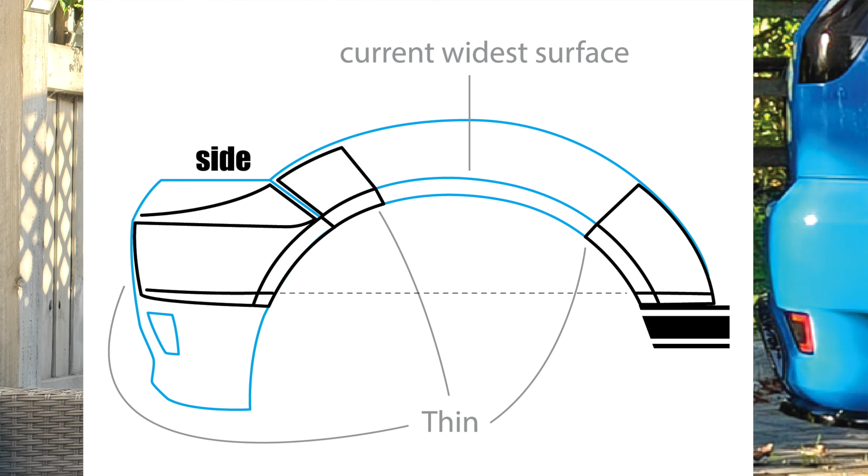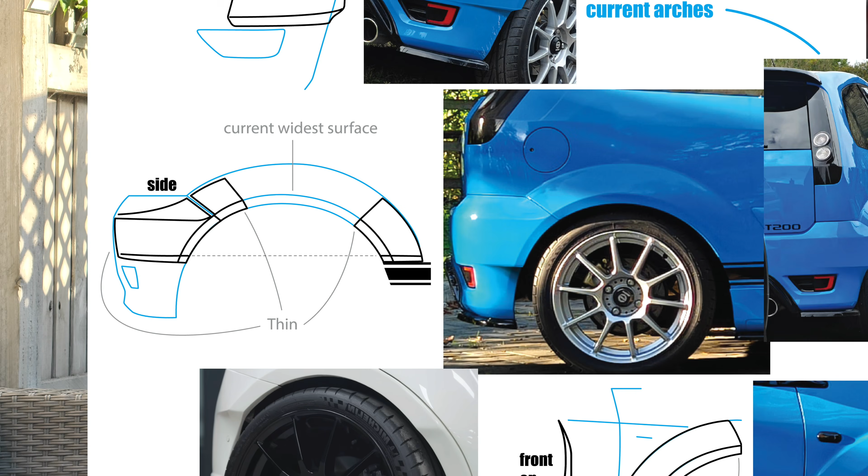Now, something I haven't mentioned, it's quite funny, because this is wider in a sense, but also not. Basically, the profile down the side of the car, what I didn't want to change was the widest point, the 12 o'clock position of the front and rear arches. The reason for that is I didn't want to mess with rolling and cutting the arches. What was the widest I could go on the wheel setup, but without affecting that?

So basically it was looking at the lines of the car to work out how to make it look wider, but without physically making it wider, if that makes sense. So I looked at how the lines of the car curve inwards from that 12 o'clock position, and thought, why don't we continue those lines and then eventually marry them back up to the original.

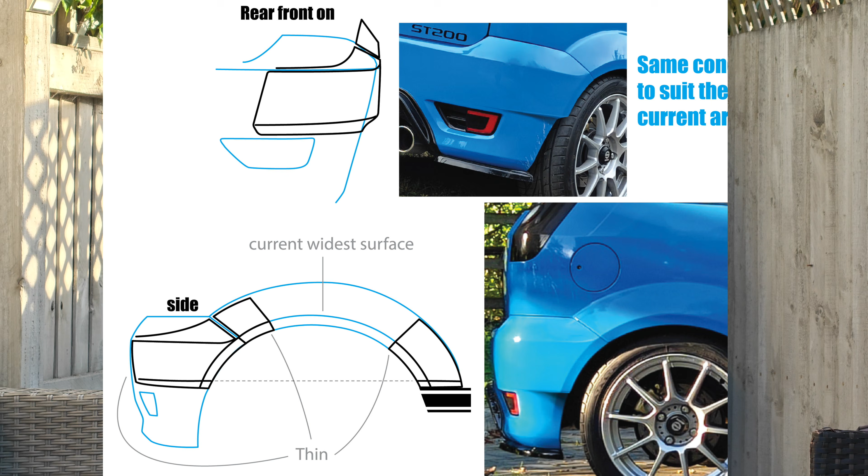I knew I was going to go with my body shop, Flawless, in New Mills, because I know John does a fantastic job. John's a good, solid name. I like it.

When I did get an idea of a price for if we were to cut the metalwork of the arches, it was very expensive, but you know what? Maybe looking back, that might not have been such a bad idea. But then it would have meant buying another rear bumper to do a lot of plastic welding. It was quite a lot of job.

So the concept I thought of, and I've seen a lot on YouTube recently, is something that's coming about - 3D printing parts. Then obviously you filler over the top and then paint. So I found a 3D printer and I commissioned it to be scanned in just the areas that I wanted.

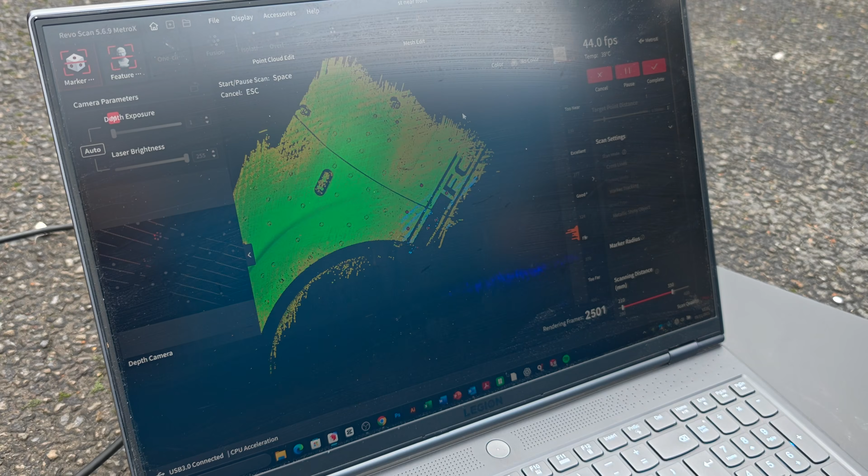So the central position all the way back and the front arches, and then at the back, again, making sure from the 12 o'clock position to the back - which later I wish I'd done the whole thing, because you'll see why.

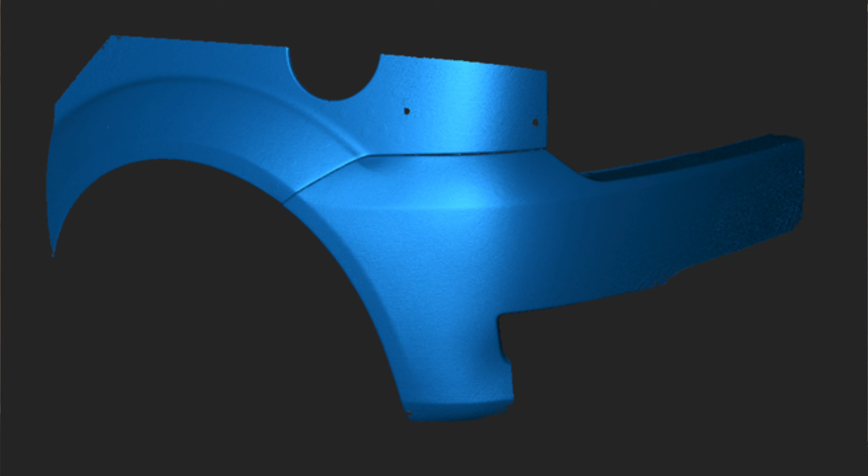So once it was all scanned, the guy had a 3D model of the current shape of the car. I then showed my concept, my drawings, and left him to it. Over the next few months, he started drawing up the new shapes for the car. He then went through 2 prototypes at the time.

The first one was to get the front arches - this was now early in 2026, and we were getting some early prototypes just to see if the 3D parts did actually mate up to the original bodywork of the car. Then we went to a second set where the shape was starting to form a lot better at the back, how I kind of wanted it to look, the lines.

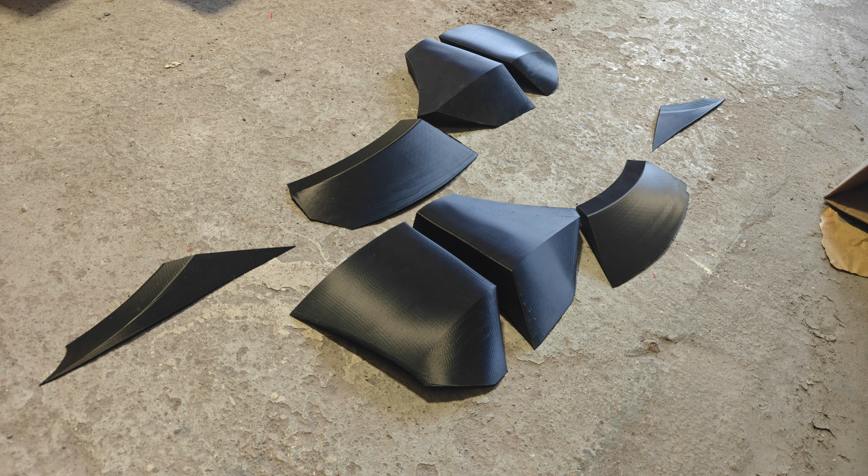And then finally, when it got to April, the final set was printed. So then you're getting to May now, where the car went to the body shop, and work was going to start progressing on getting these 3D parts bonded onto the car and worked in.

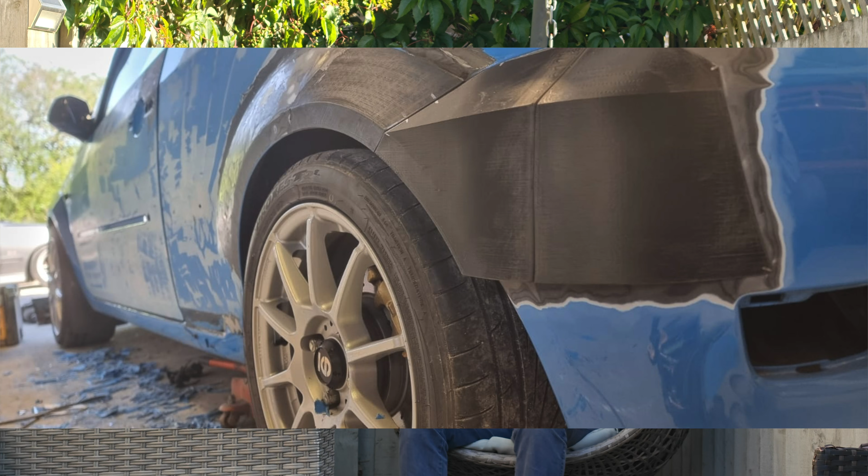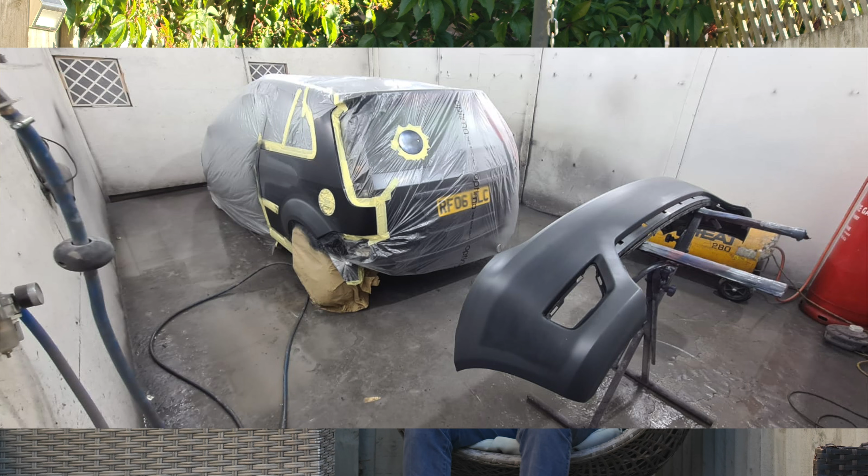Now, one thing is when John at the body shop, Flawless, started to sand back the passenger rear quarter, ready to bond on the new parts - the paint, I just want to make this clear, this isn't his paint. If you've followed me for a long time, you'll know that early on when I got the car, and I originally was thinking of keeping it all black, I got some body repair done on that panel, and I was never happy with the colour of what the guy had done.

Basically, I remember that car was given to him, and within days, it was all done and ready to collect, which was amazing - I thought, yeah, fantastic. But actually, what I found out was that it was rushed, and it wasn't done properly. Probably also why it always looked a bit weird in certain light.

Basically, it was pretty much flaking off, and you could see the layers - the blue paint was fine on top of the new black paint, but that black paint underneath, done years ago, wasn't done properly against the factory finish of the car, and it was all peeling off. Some sort of reaction. So it was going to happen eventually - it probably would have bubbled up.

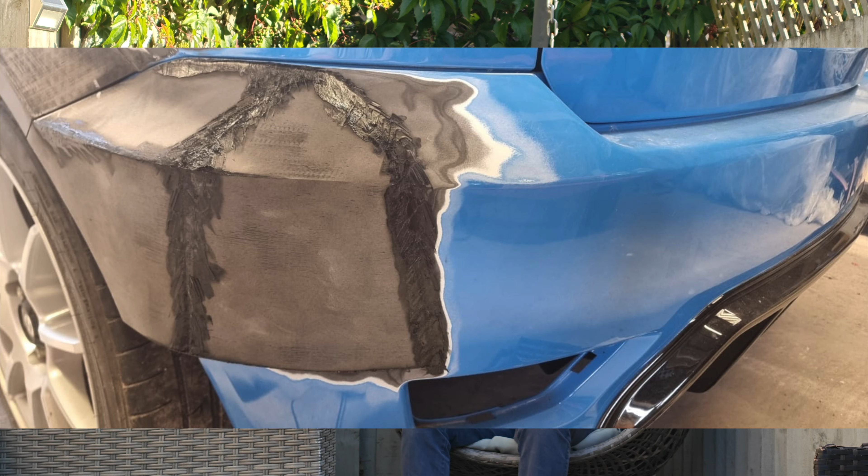You now have got the parts bonded on. Then it was a matter of him doing some plastic welding to make sure they all stay tight together, the parts that needed to be. They were nice and solid. He was making sure there were days and days for it to be fully cured.

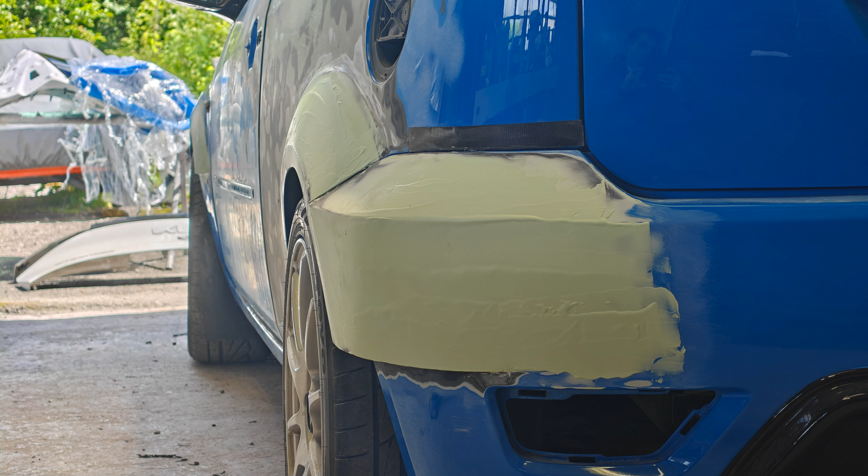Then it was a matter of filler, like fiberglass filler as well, which is notorious for max power cars. To be honest, people will probably stick their noses up at the fact that there's going to be lots of filler and fiberglass filler on this car. But you know what? That just makes it more of a max power car.

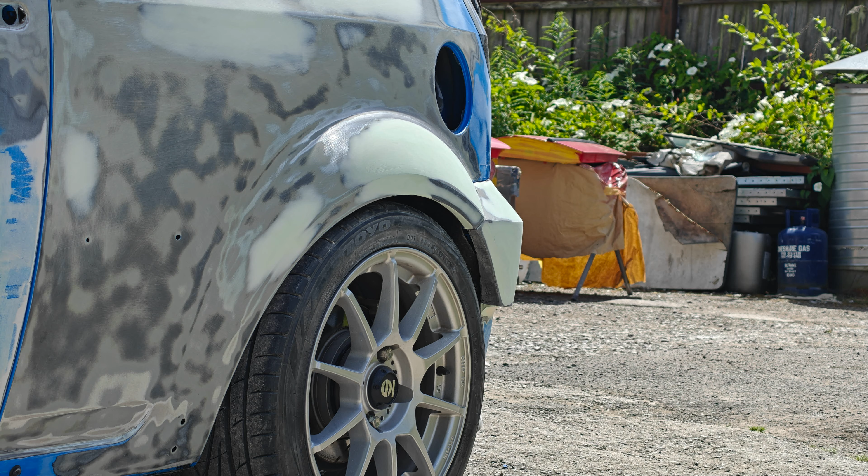What he kept doing was - the reason it took so long was he wanted to make it perfect. In order to do that, he kept having to do lots of thin layers, sanding it back, checking the shape, adding more filler, and the process kept going on and on.

It got to the point when he started to get it painted, because we were in a rush now for Max Power Reunion, the car show. It wasn't quite going to be ready, and I also needed the car for its MOT as well.

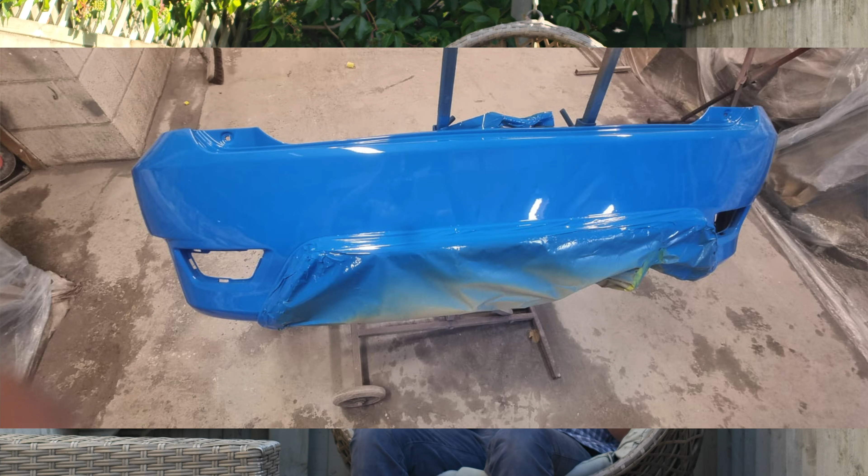I actually had to take it in, just after being painted, when it was only starting to get sanded back and polished, for its MOT. So I had to pick up the car, which was not looking in its best state, but enough to get it passed, which luckily it did. It's got a few advisories, things like the front and rear subframe and axle needing doing, so that has to get done early next year. But it did pass, I was thankful to hear.

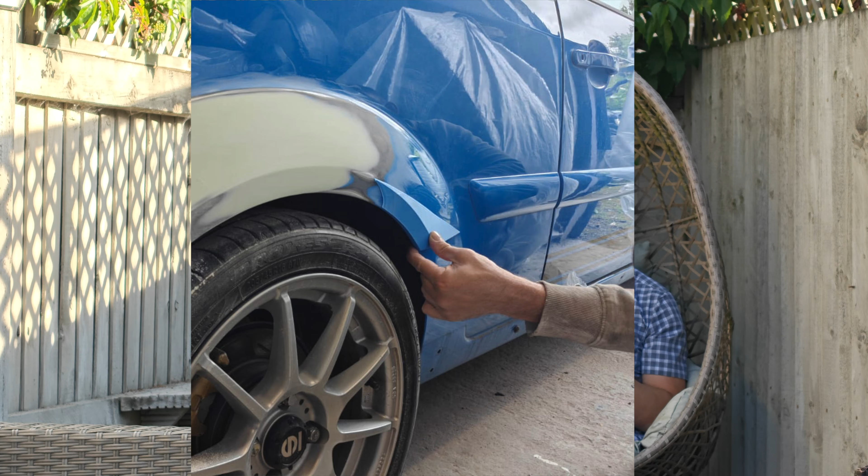But it went back to the body shop, and as it did, I looked at the front of the rear arches, and for me something was missing. The front of the rear was left standard, and it wasn't mating up with the new lines at the back of the car. We were running out of time, so I thought, right, we just need to get this done now. I got the front 3D parts printed, and we thought they'd probably work. He had to work his magic to get it nice and in line with the rear.

He's been happy with it, and I'm really happy with it. And it went into primer. So this video should hopefully be coming out within days of me getting these pictures of it in primer.

I wanted to leave the progress there, because the next step is it's going to be painted, the clear's going to go on, he's going to do his usual magic to make it look mint - sand it back, polish it all up. All the parts need putting back on, and I want to show a second video of a full reveal of how the final look, the final WRC one-off custom arch kit on a MK6 Fiesta has turned out. It will have its first debut at Ford Fair, and it'll be on the Oval Owners Club stand as well.

This has probably been quite a long video, basically listening to and looking at me talking about this over a long period of time. I'm trying to work out now from when I first did it to when it's going to be finished - it's like 10 months from concept to me finally getting the car back, which is just crazy.

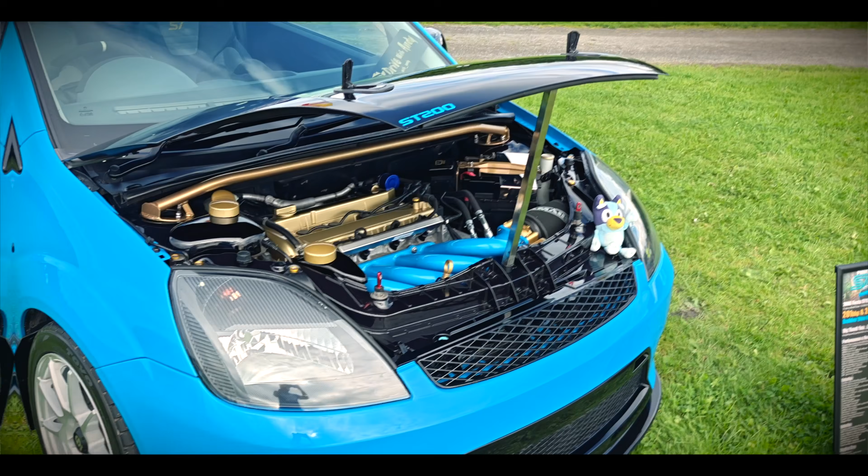I can't wait to get the car back because it's going to look and feel so special. I mean, it already kind of did for me, being in the only grabber blue metallic of that shape Fiesta anyway. But now to have this custom WRC body kit nearly ready to go out and drive and share with everyone at shows, I'm so excited to see what people think of this.